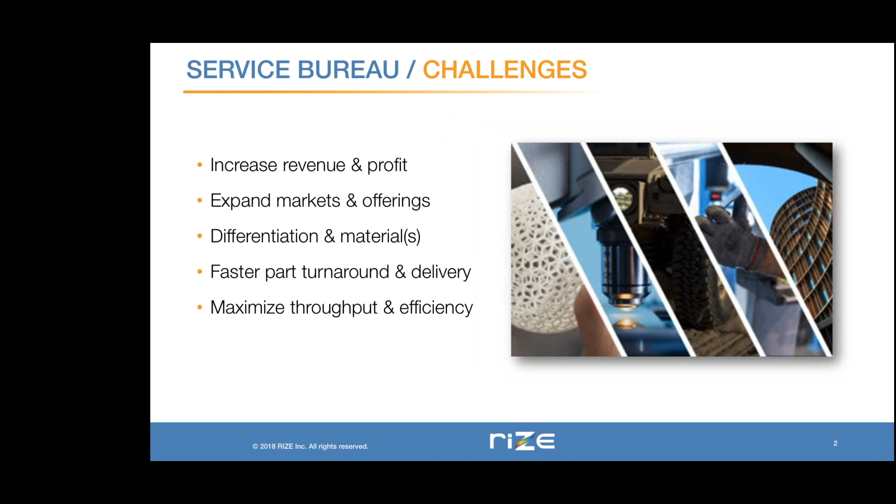First, I'd like to talk about some of the things that challenge service bureaus, some of the things service bureaus need to pay attention to and address for their business model to work for them. Of course, for any business, one of the main things you need to stay afloat is to make sure you're bringing in enough revenue and profit. For service bureaus, this is particularly important because of how directly their use of 3D printers is tied to their ability to market and deliver parts to their customers.

Another important point for service bureaus is making sure they're able to expand their markets and offerings. There's a limited amount of any market available for service bureaus or other manufacturers to deliver parts to, so it's important for them to stay on the front edge of the technology so that as new requirements appear, they're able to take a portion of the market and not fall behind their competitors.

Another important point, which ties closely into the last, is being able to differentiate among different technologies and materials. For many service bureaus, one of the most effective ways to gain market share and increase profits is by offering things competitors aren't, or accomplishing things with their set of technologies that is unique to them. This could include offering a more diverse set of materials, or being able to do different types of things with parts and address a wider array of applications.

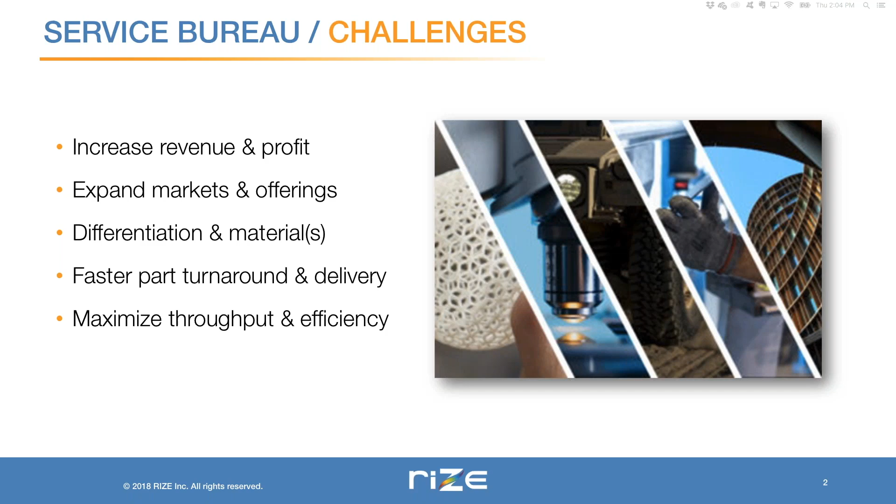Now we'll give a quick overview of what Rize is capable of and some of the things it offers to not only service bureaus, but all of our customers. We have a few technologies currently in development. Two of the main ones releasing this year are carbon fiber infused filament and a new machine called the XRize, which is capable of producing full color parts.

Some other things that differentiate us from competition are the speed and simplicity of our full process. We have highly automated proprietary software that streamlines the pre-processing step of preparing parts. We also have a very simple user interface on our machine that requires very little training before a user is capable of getting the most out of the machine.

We also have the ability to make support removal very quick, so you don't need to spend a lot of time working on parts after they've finished printing.

Another point that separates Rize is the strength of our material. Our material, called Rizium One, fuses very well from one layer to the next, which makes it very strong in the z-axis, and it seldom delaminates between layers.

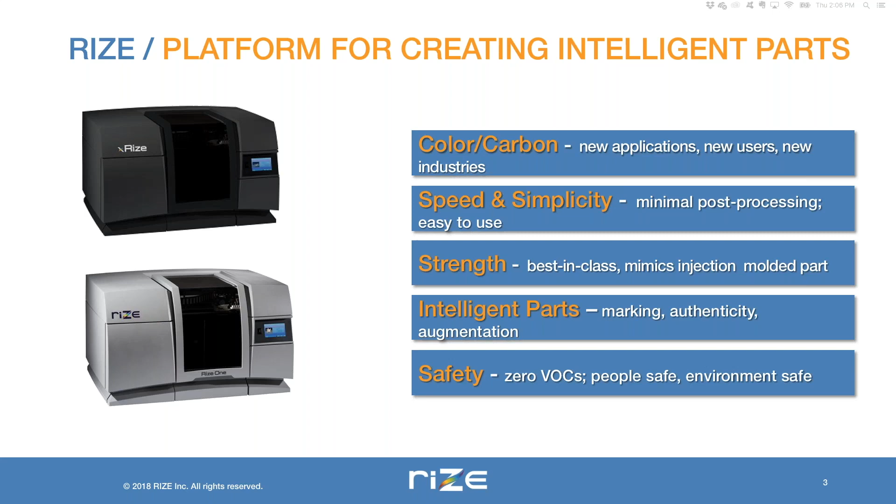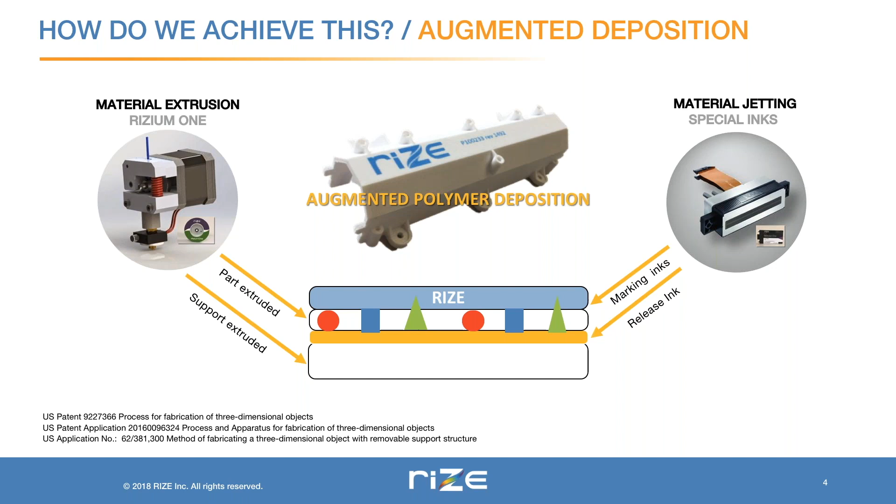The technology is essentially about this: between each layer of extruded thermoplastic, we are able to jet different functional inks using the type of print head you would find in a 2D printer. Depending on the type of ink we use in these print heads, we're able to achieve all sorts of different effects. So the way it typically works is that we'll begin by extruding the support structure on which the part will be built.

Above the support structure, we jet what we call a release ink, which makes it easy to separate the support from the model structure above it. Then we will extrude the model structure, again in thermoplastic filament, and finally between layers of extruded thermoplastic, we're able to jet functional inks such as marking ink, which allows us to color parts with the different marking inks that are installed into that printer.

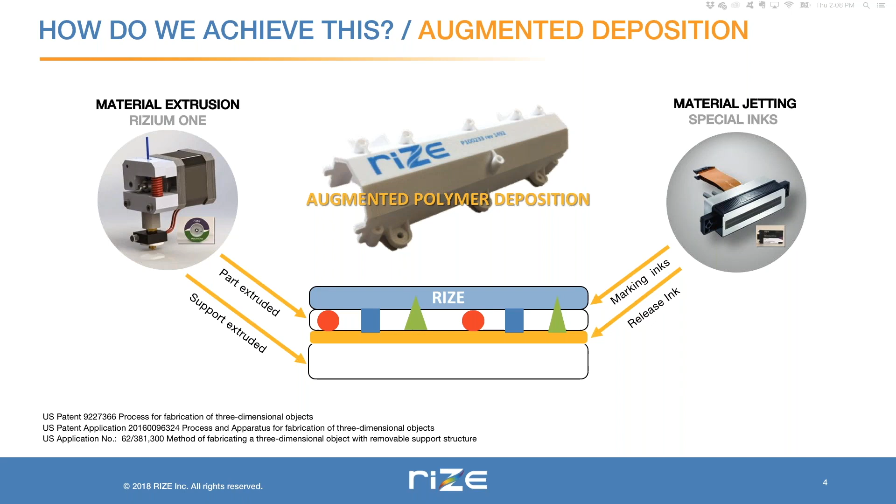Some of the things you're able to achieve with this marking ink include applying part numbers, versions, dates, and customer info. This allows you to keep track of the different types of parts you're producing and the different customers you're producing them for, without as much of the trouble you might have when producing a very large number of parts and needing to sort through them and keep track of them.

There's also the ability to apply what you see in the middle and on the right here, a QR code. QR codes, if you're unfamiliar with them, are able to store essentially any amount of digital information. A basic QR code will just store a small amount of text, but by connecting a QR code to a URL, you're able to link it to virtually any amount of data attached to a web page. Using that technology, you can provide very detailed information attached directly to the part that can't be removed.

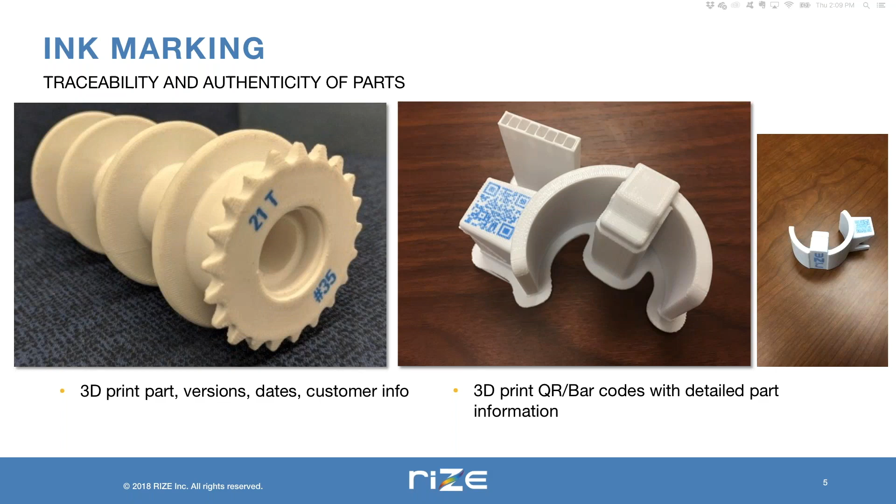So now I'll discuss a bit more about our material. It has several factors that differentiate it quite a bit from similar technologies. We call it a high-end engineering compound. It is produced entirely with ingredients that are medical grade. It is very safe for skin contact and food contact, and it doesn't produce any harmful chemicals as it's printing.

The reason for that is that whereas most thermoplastic filaments will decompose or slightly burn at the temperatures at which they're extruded, we are able to extrude Rizium One at a much lower temperature than its decomposition temperature. Because of this, it doesn't decompose into any harmful chemicals, so you don't need to vent it or have any special equipment for preventing the harmful chemicals emitted by other thermoplastics. You can have it in a small enclosed space and it will be perfectly safe.

Some of the other valuable features are that it has essentially negligible moisture absorption—less than 1% that of ABS. So ABS absorbs moisture at a rate of 1%, and Rizium One absorbs it at only 1% of that amount.

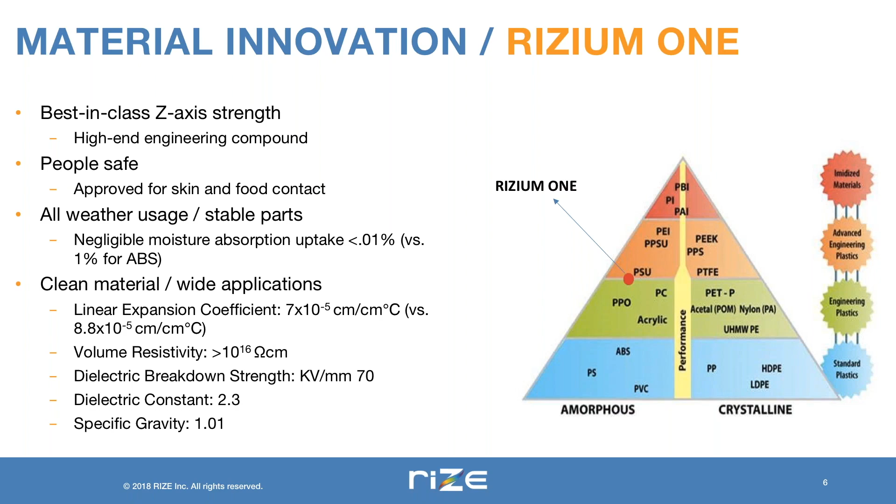So here are some of the values regarding its safety features. As I mentioned, it produces zero VOCs as it prints. It is made entirely with medical grade ingredients. It is skin and food contact safe. And one thing I didn't mention is that after printing, this material is perfectly safe to put into a recycle bin, and it can be processed using normal recycling processes.

In 2018, it won an award for best practices in technology innovation in the zero emission polymer material additive manufacturing industry from Frost & Sullivan, based on the set of safety features listed here.

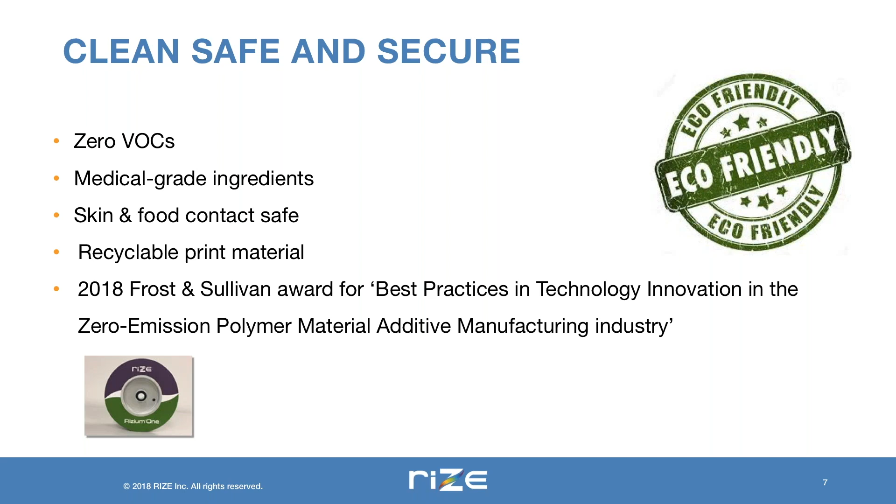Some things about our process make it quite valuable, particularly for reducing turnaround time, or the amount of time it takes to get a working part into the hands of a customer: minimal pre and post processing. Our software that slices the parts and prepares them for printing is highly automated. We've done a lot of work to make sure you don't need to be an expert in the software, or even in FDM printing, to get a successful print.

Once the part finishes, you can typically post-process it by removing the supports, and this will take anywhere from a few minutes down to even a few seconds. This is because the release ink we jet between support and model structures acts as a lubricant that allows you to peel away the supports, often by hand.

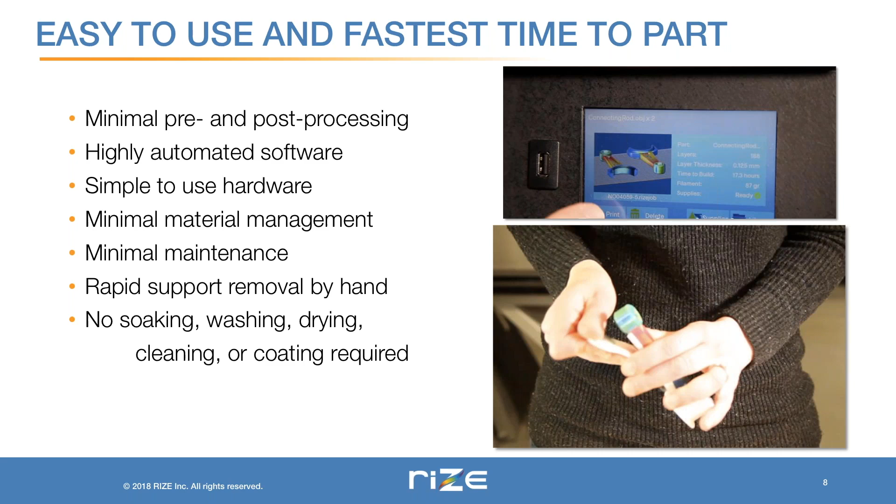There's very little material management required for the printer, and very little maintenance. You essentially just need to insert the material cartridges, and they'll take care of what they need to until they need replacing. Finally, because you can remove supports primarily by hand, or otherwise with pliers and other simple tools, you don't have to go through the soaking, washing, drying, cleaning, or coating processes required by some other 3D printing technologies. Because of this, you're able to produce parts very quickly and meet very short turnaround times you may not have been able to with other technologies.

Here are some of the common applications that have been met by Rizium parts. There is functional prototyping. Because we are an FFF machine, a thermoplastic extrusion machine with a very high Z strength, we're able to produce functional parts that can be used in all sorts of industrial applications.

We also have the ability to produce parts in full color, and this allows for not only design prototypes, but functional design prototypes that can be handled, passed around, or even used in industrial applications, maintaining both structural integrity and surface quality. We've also produced parts for tooling and manufacturing and service parts, which is, of course, the focus of service bureaus, producing parts for end use by their customers.

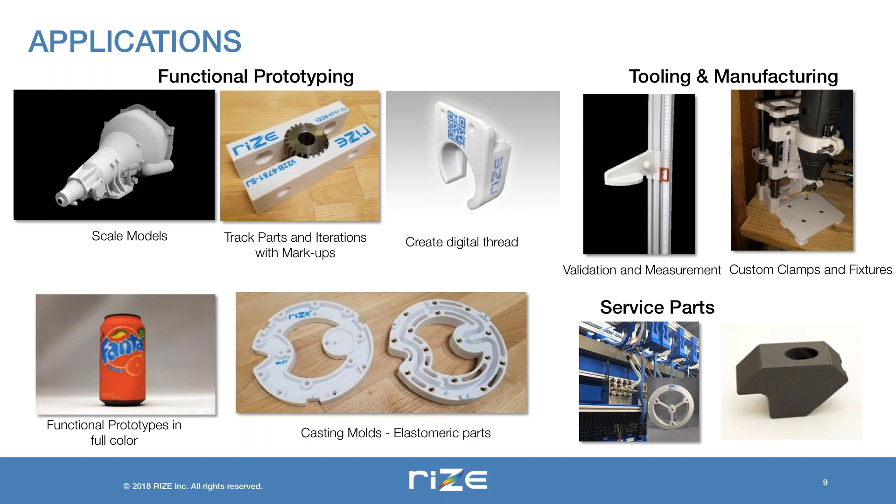I'd now like to talk about the technology we are developing for release later this year, the XRize. Our first printer, the Rize One, is capable of printing with one color of marking ink - that's the blue you can see on the QR code at the top. Our XRize is going to be capable of printing with the full spectrum of marking ink colors, and this allows you to achieve all sorts of useful effects.

This can be useful in engineering capacities for visualizing the stresses or displacements of simulated models. It can be useful for geography, geology, and architecture for producing scale models of either architectural buildings or geological areas, which is useful for surveying and other things like that.

This technology can be useful for life sciences, and the parts it produces will be strong enough that they can be passed around and handled while maintaining their durability. Finally, it can be used for product design, which is useful for any sort of packaging company, or a company that requires the use of packaging for their products.

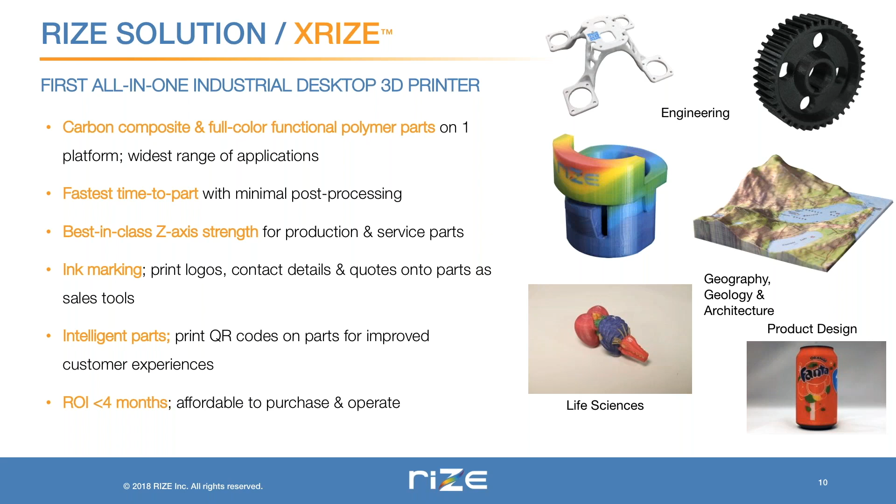I'd like to talk about one example of a customer of Rize's that has served as a service bureau and been very successful at that. This is Azoth, a tool crib company that provides services to industrial manufacturers, particularly in the automobile industry, using Rize to provide replacement parts, tooling, and other fixtures and jigs. They're able to deliver parts requested by customers much faster than with traditional manufacturing, and they've benefited not only from the speed of 3D printing with Rize but also from the safety and the ability to apply marking ink.

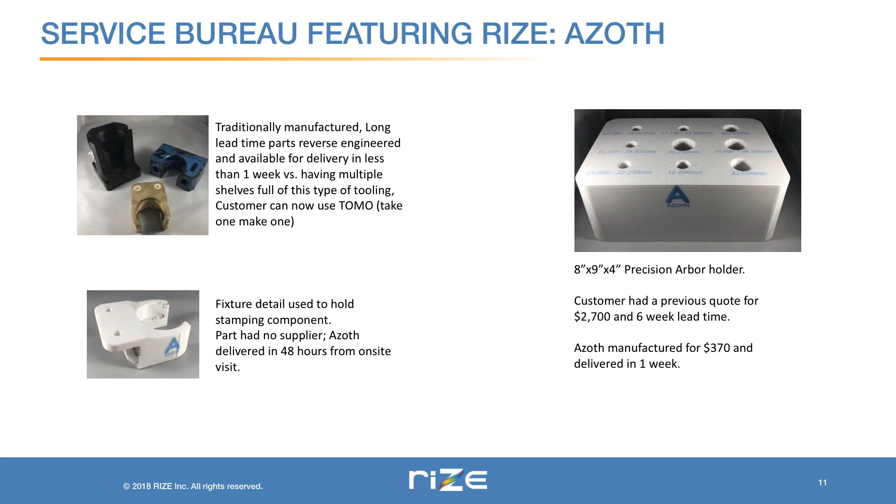Here is a more detailed view of some of the things offered by Rize. The competitive differentiation and increased utilization and flexibility required by service bureaus is offered by Rize in the sense that our functional, full color, and carbon composite parts are able to be printed on the same platform. So with a single printer, you're able to gain quite a bit of flexibility in what you're able to 3D print.

Regarding the service bureau's need to deliver parts faster, we're able to do so because of how easy and quick it is to remove support and how simple it is to use the machines. We produce very high quality parts due to our heated build chamber and the material properties of our different Rizium materials. We also offer traceability and a sales or marketing tool through the marking ink on both of our printers, which can print text, images, QR codes, etc. This is useful to service bureaus for tracking or authenticating parts created for customers.

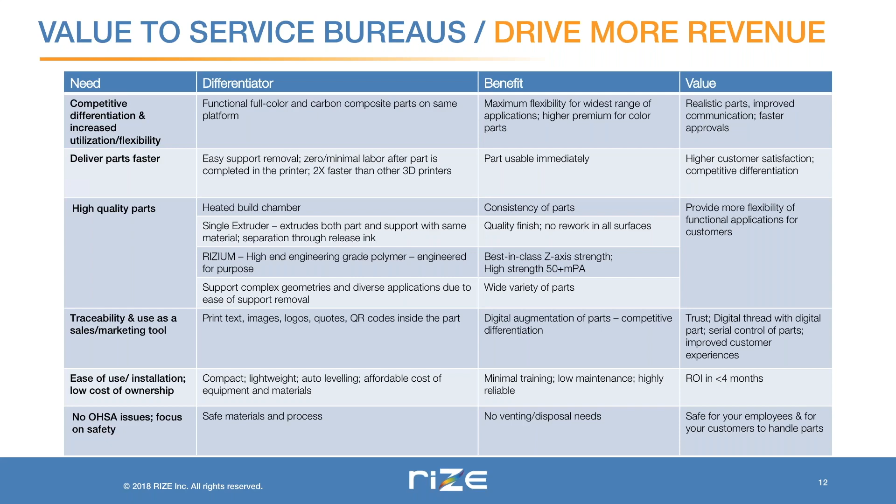So just as a quick summary: the XRize machine is able to produce both color and carbon parts, which is useful for service bureaus because it greatly expands the flexibility of what they can offer with just a single machine. It produces usable parts very quickly because of how little post-processing is required. These parts are very functional, using a strong material, especially in the Z-axis, compared to similar thermoplastic extrusion technologies. It's also capable of incorporating digital authentication and traceability using marking ink, making parts intelligent, where each part can be linked to its digital identity. Finally, it's an affordable machine because all these components produce a very fast ROI for those who use it effectively.